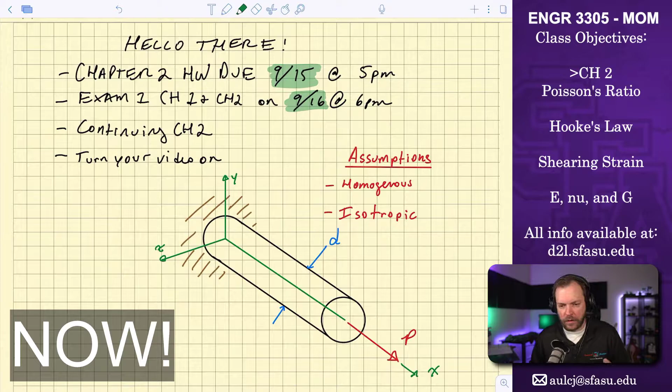All right, so kind of a review from last class. We're dealing with chapter 2, which introduces the concept of the stress-strain relationship and axial load. One of the things we talked about beforehand is that the major assumptions we're going to make in this class going forward are that we have homogeneous and isotropic materials. So homogeneous, what does that mean?

You can unmute yourself or type in chat. Is that a single body? Not so much. But when we say, for the context of this class, that a material is homogeneous, what does that mean? It's one solid, one material, right? Not specifically. It's saying there's no difference spatially throughout the material.

The big thing is like the difference between a chocolate chip cookie versus a sugar cookie, right? So we're dealing with sugar cookies in this class, not chocolate chips. With chocolate chips, at some points in space you might have chocolate, and at other points you have cookie. That's kind of the point here. It's an important distinction because there might be some materials you work with where that doesn't hold true.

The other one is isotropic. So what does isotropic mean? Are you guys even here? What's going on? Is that the XYZ plane, the way it sits in the XYZ plane? Not so much that. It's an assumption we make about the material.

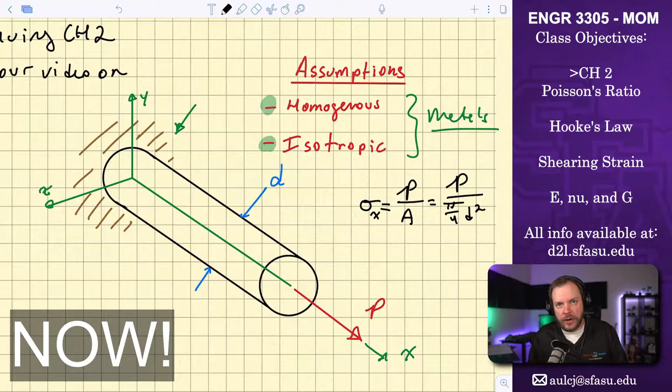It would be axial stress in this case, down the x-axis, or sigma x. That would be equal to whatever my load P is divided by the cross-sectional area. That cross-sectional area we could rewrite as P over pi over 4 d squared, the way we have it written.

And we know from Hooke's law that this sigma x would be related to E, and we're assuming it's isotropic and homogeneous. So we have the E, which is what?

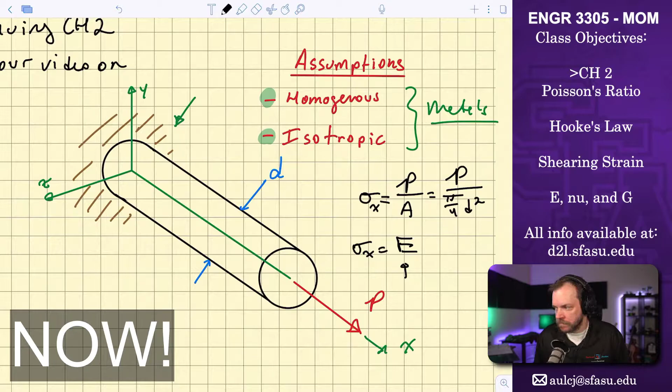What do we call E? Young's modulus of elasticity. Yeah, so Young's modulus or modulus of elasticity, but typically you don't say Young's modulus of elasticity, it's too much. I was looking at data sheets for PLA yesterday, and they had something weird - they didn't have Young's modulus, they had tensile modulus. That's similar. So the idea is there's a modulus of rigidity, which is sometimes used for shearing, and we'll talk a bit about that in a moment.

But that's probably referring to this relationship here, because plastics to a certain extent can be assumed to be what we call linear elastic - if it abides by Hooke's law, this is a linear relationship. You should know that. So E here is just a variable dependent on the type of material, and epsilon x would be the deformation along the x direction.

But we also understand that if I were to pull on this long enough, there would be a deformation that occurs in the diameter direction, or the lateral direction. This relationship between the strain we'd expect to see along the axial direction versus the lateral - there is a relationship between those two, and we'll talk a bit about that.

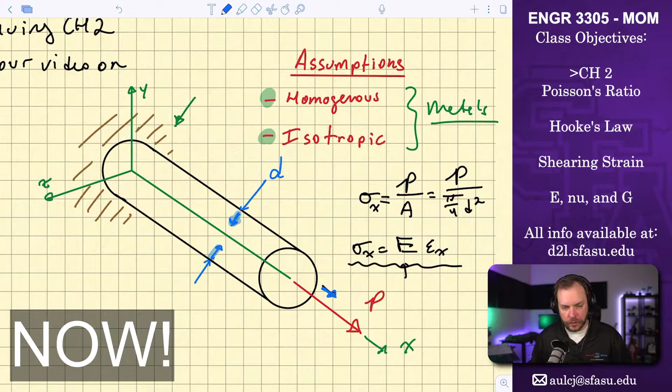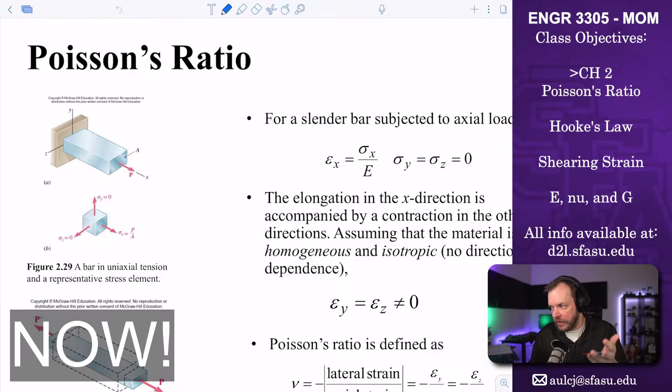The first person to really observe this relationship is a French mathematician, Poisson - Siméon Poisson, the same guy that Ely had brought up. He's a mathematician, very popular. This idea of pulling on a piece of material with load P - if I were to take any block out from this piece, I could qualify it and say the stress is going to be the same across the surface. We're assuming load P is applied in such a way where the stress is consistent.

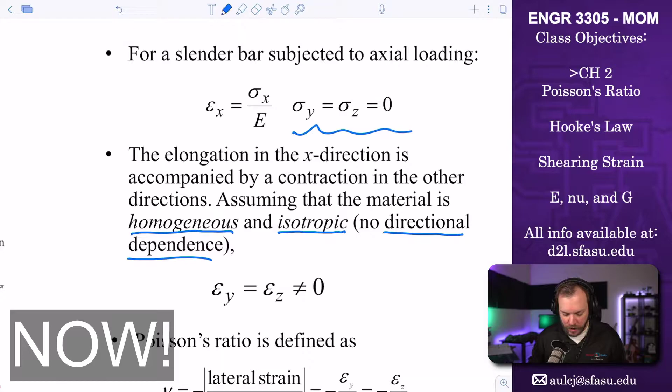We do not expect to see any stresses in the Z and Y directions based on our reference points here, but that does not mean we're going to see no strain. So the strain that comes into play, even though the stresses are considered zero, there will be strain in those directions. That's where we say homogeneous and isotropic - a simple way of putting it in layman's terms is there's no directional dependence or spatial dependence, it's all the same material in every direction. These strains are not going to be zero, so that's an important aspect to understand.

Poisson's ratio is used, and we use this Greek letter. Does anybody know what this Greek letter is here?

Nu. This is nu, and the way I write out nu, it looks like a V, so it can be confused with V. So I typically write out nu as having almost like two curls that we kind of see there. That's really exaggerated—a lot of times it'll look something like this.

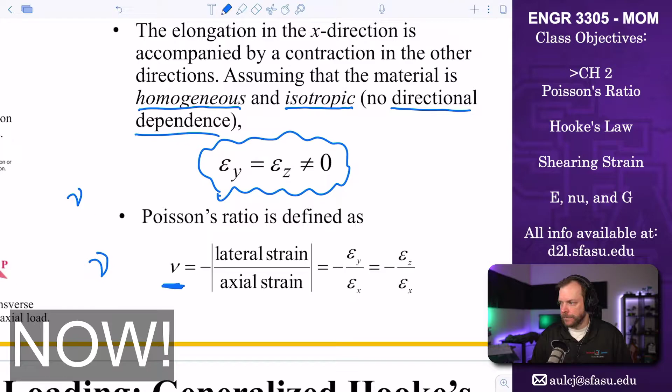It's a ratio of strain. So what are the units of nu, or Poisson's ratio? Unitless? This one is indeed unitless. There's no special units like millimeter per millimeter or anything like that. It's unitless, and typically it's going to be bounded—around 0.3 for a lot of steels or metals, but always less than, or less than and equal to, 0.5.

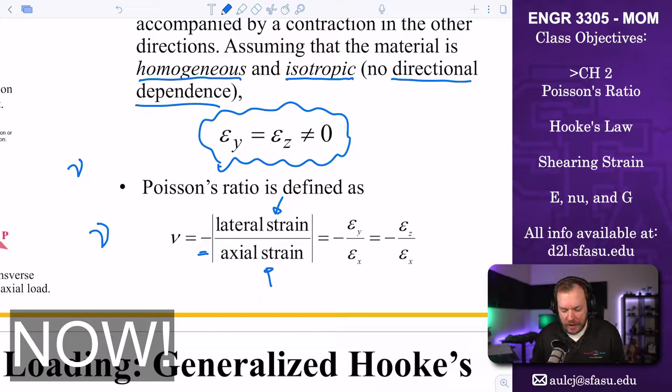I think you have to look into some theory of elasticity to see what this relationship is. It's a negative quantity, and we say the lateral strain, which is the strain in the direction out of the plane, and the axial strain is on the bottom. In the example of my cylinder, we have this quantity, this relationship—let me get rid of this, sorry, that's been up there. I was about to say something.

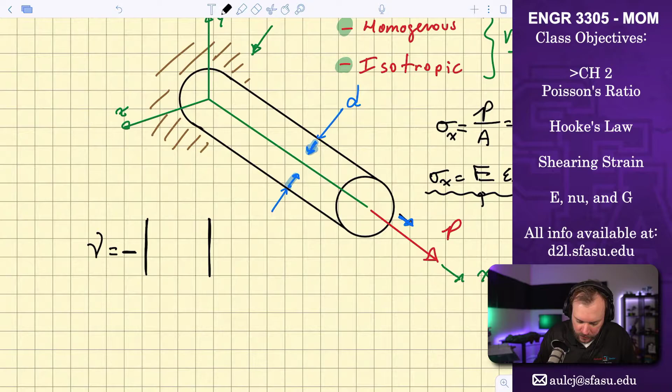Okay, good, unitless—yeah, nu's unitless. So here we've got Poisson's ratio, which is equal to, and we have to remember there's a negative here, and then the absolute quantity of it. In this case, if we're doing this in a particular direction, I can choose either. So the lateral strain—say for instance, epsilon y over epsilon x. That would be my relationship for Poisson's ratio.

Now why is there a negative here? Why do you think there's a negative that's put there? I'll look at chat, or just guess—do you have to do something with the graph?

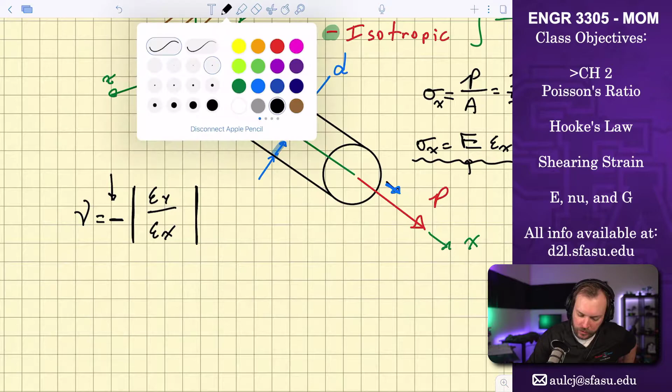Well, let's think about what's going to happen here. If I have strain where this is starting to come out like this—say, for instance, this part is elongated—that means epsilon x is positive, correct? It would be positive strain because it's elongating. Remember, if it elongates, it's positive strain; if it contracts, it's negative strain. You can have negative strain, right? What would happen if epsilon x is positive? What's going to happen to epsilon y?

It would shrink a little bit. It will shrink, okay? So think about it—if you take a rubber sheet or something and you pull on it, you'll get long in one direction, but it's going to get smaller in other directions. That's why the negative is set up.

A better way to look at this is I'd say epsilon x is equal to negative nu epsilon y. So if I have a positive relationship for epsilon x, I should have a negative for epsilon y. Does that make sense? There has to be a negative—there's going to be a reduction in quantity there.

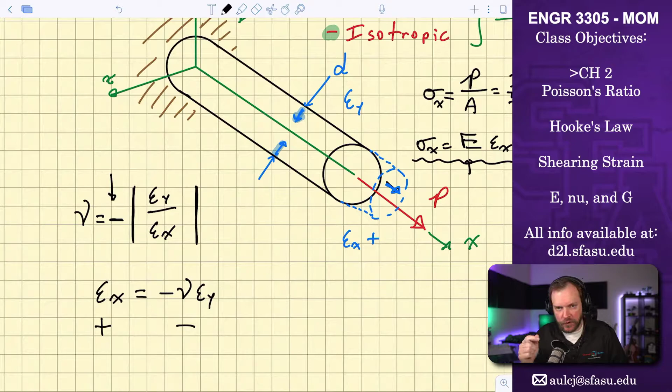Reduction—now, one thing you have to recognize, it's conservation of mass, but it's not conservation of volume. In fact, the volume that you'd expect to see—if I'm given the way they're showing this here, this was the original shape where the dashes are, and this is the new shape, already strained. Remember, we're not considering the dynamics; we're only considering after the loading has taken place. So if the shape was originally in the dashed line, there's going to be contraction. In a real case it won't be completely uniform, but here we're just assuming that it is—like it's going to be complete reduction.

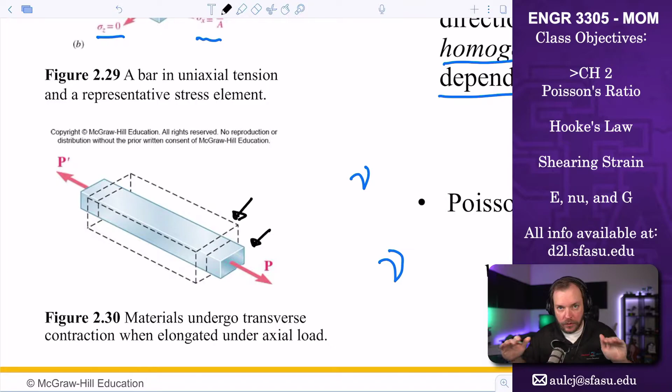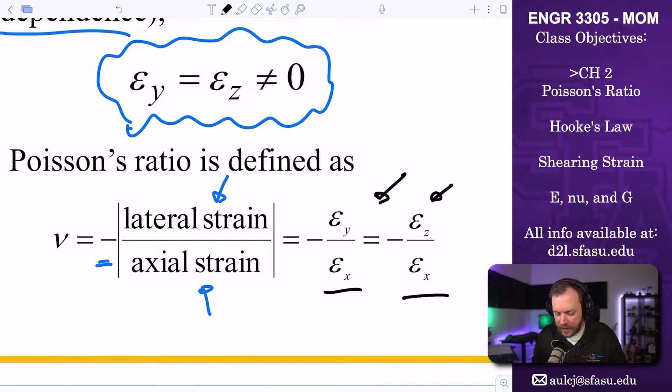In this case, you can use this relationship for both epsilon y and epsilon z, and it's always referred to by the axial strain, which is defined by the fact that we're working with axial load—so this is when you're pulling on something along an axis, it's always dependent on that. The volume will change; there will be a change in volume, okay? And that's touched on a little bit afterwards.

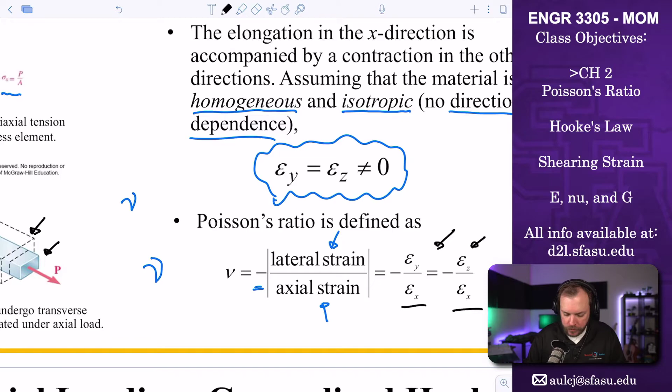But the important thing to remember is this is something you should just know right off the bat. I shouldn't have to say, if you're working a problem out and I say tell me what the change in the lateral dimension would be, you should then go through and model it and know Poisson's ratio. This is also categorized or cataloged in the appendix—appendix D, I believe, from last class. It shows up with the yield stress and so on and so forth. So that's an important quantity to follow through, and there are some homework problems based on that.

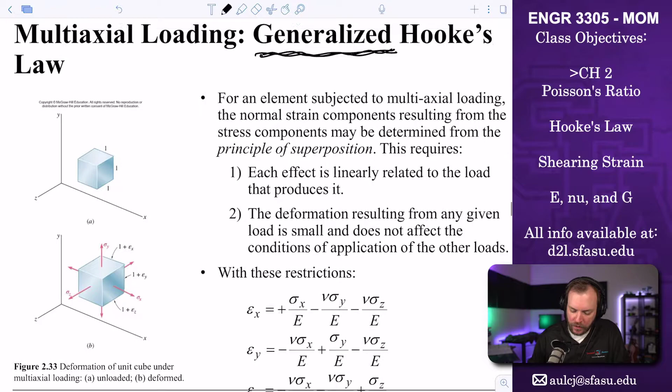The next section describes what we call generalized Hooke's law. This sets up relationships that will be helpful in the homework and on the exam, given a three-dimensional setup with this idea of principle of superposition.

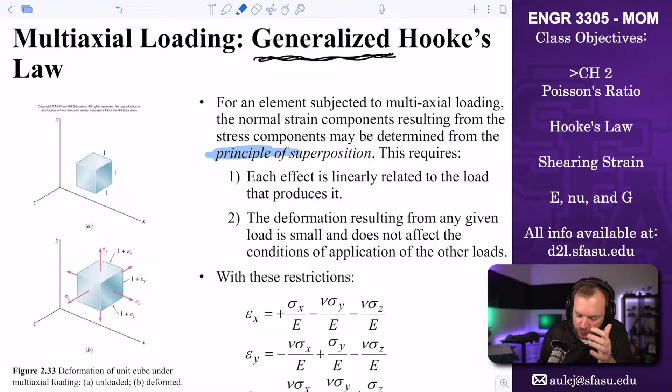If you're taking notes, this is something you really want to write down, and it's going to hold true for the rest of the class. If I had to have one statement about this class, it's that we're using principle of superposition. What is principle of superposition?

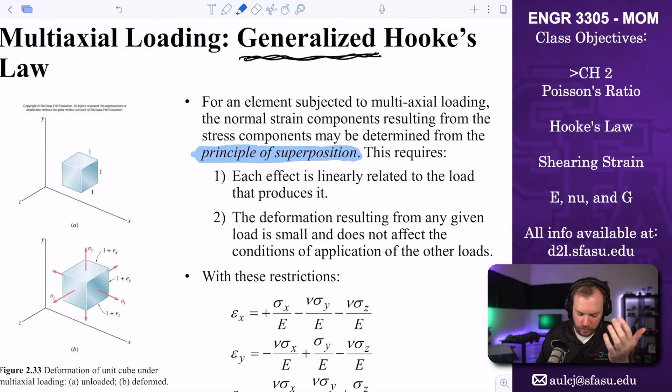It's this idea that we're working with typically very small deformations relative to the size of the original object, and also we're working with loads that do not go past what we call the proportional limit. So what is the proportional limit for a material? Yield? No, you're on the right track.

A lot of times yield stress, right? Coming back to our stress strain diagram, this is my sigma and this is my epsilon. For a given material, you have a linear relationship, and then at some point it stops becoming proportional. So when we say proportional limit, it's no longer proportional, meaning it no longer has that linear relationship. And if we go past here, we cannot use principle of superposition.

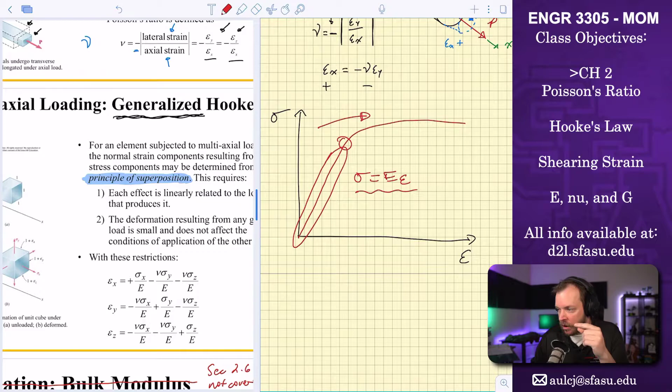But if we are living in this region, remember, when sigma equals E epsilon, we can use Hooke's law, we can use superposition—at least for one part of the problem. The other thing we talk about with principle of superposition is that for multi-axial loading, with different loads—whether shear, bending, or any other type of problem—the second axiom is saying that we have to make sure the deformation resulting from any given load is small, and it doesn't really affect the conditions of the application of other loads.

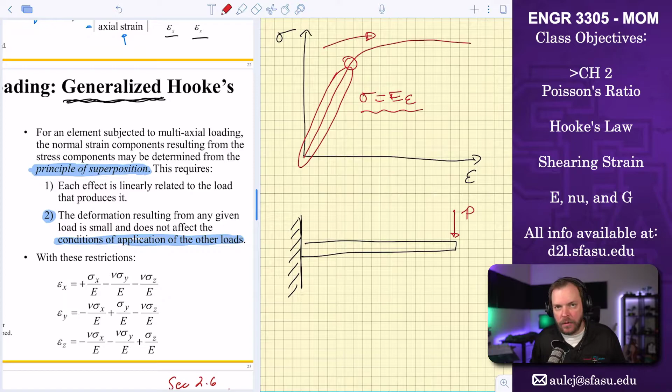What does that mean? Let's consider a beam sitting off the edge of a fixed wall. If I were to put a significant enough load down at the end, now we're not dealing with axial loads, but this is probably my best way of illustrating this—think about a diving board. If I had a diving board and put a load on it, I would expect to see it do something like this.

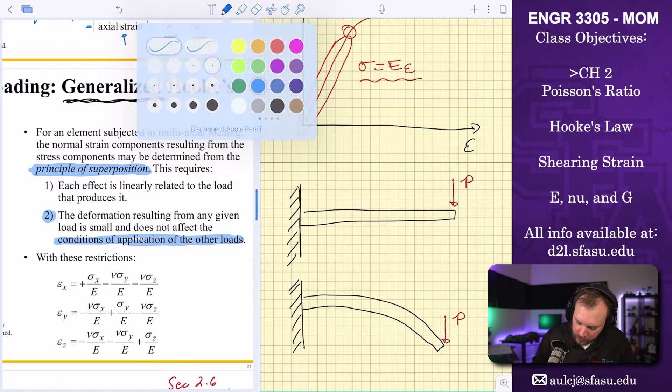Now, if I have the same load P—I drew it bigger, so technically it should be the same—if I have the same load P, and it causes this to deflect downwards so much that, if we assume this is the same location, now we're at a new location. So what's happening there is it's changing. If I were to do a free body diagram for this, what's going to be different is the position of the force moving the moment.

So it's going to change—not the axial or transverse loads, but it's going to change the moment. And if it changes the moment, then it's no longer static. Technically it's in such a way that there is some change in the relationship.

This typically occurs when we see excessive deformations. A lot of times the way I think about it in this class is in order to use principle of superposition, you're linear elastic. And typically if you're linear elastic—unless you have a very big elastic range for a material, especially with metals—you'll also satisfy that you're not going to see a significant change in the positions of the load. That's what some people were asking before.

It's like, well, if you were to add the strain in there, technically it would move it enough that it would be a change in the moment, and you could actually calculate that change in the moment. It's going to be such a small value that it really doesn't matter. So if those two cases hold true, which are major assumptions, then you can use principle of superposition.

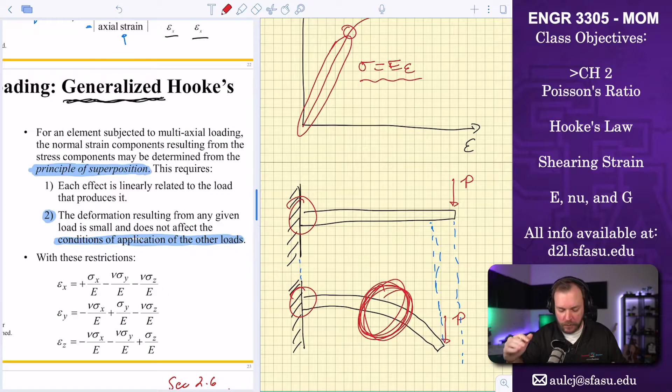Well, what is principle of superposition? What that represents is now I can consider, say for instance, I have a load in different directions, and that's why they talk about this idea of multi-axial loading.

Meaning I have loading in the Y, the X, and the Z. If I have different axes, I can consider these as three different problems in X, Y, and Z, and then add together the strains that develop.

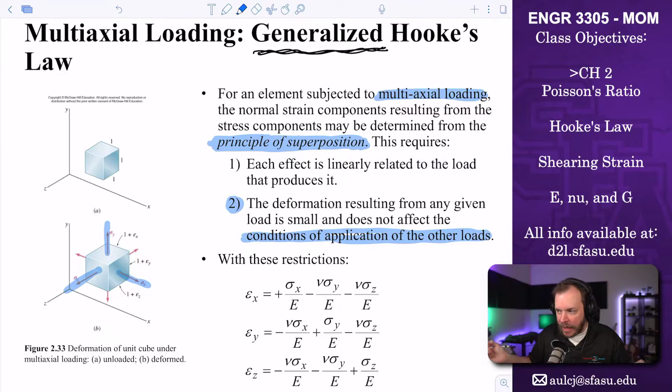This is going to be the same thing when we get into shear or bending. Once you get used to all the different loadings and what kind of strain they develop, you can just add all those strains together. Same thing goes for the stress.

I'm not going to go through the derivation, that's in the text, but you can think about it. If I want to find epsilon x, from Hooke's law it should just be sigma x over E of the material. Remember, E is isotropic and homogeneous, so it's going to be the same in any direction.

But you also have to consider that there will be some change in dimension from the stresses occurring in the Y and Z directions. You're going to have a homework problem that gives you this complex loading structure, telling you there's stresses in each direction and asking for the overall change in dimension. You'll have to come back and look at this relationship.

On an exam, if you wanted this as your theory, you can start off with that. Now, a lot of times maybe you won't have one of these stresses, maybe you don't have stress in the Y. You can ignore that or say it's zero, but you have to consider the stress in the other directions. This is where Poisson's ratio shows up, it always shows up in the out-of-axis stresses.

If I have, in this case X, we know the relationship for strain in X is just going to be nu sigma Y or nu sigma Z. Does that make sense? Is that clear?

So this is a small section, but it's really important: understanding this idea of superposition and when we can use that. Any questions so far?

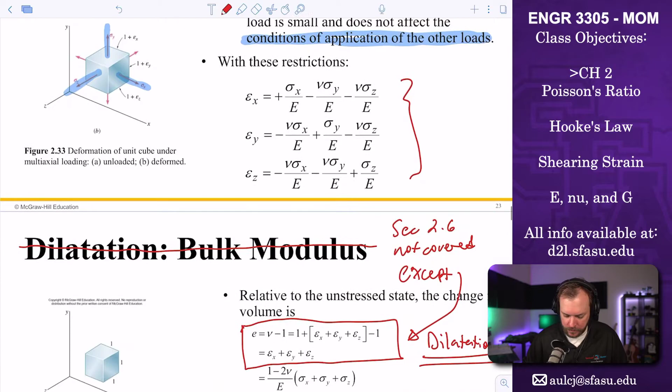I had mentioned before that any chapter sections with a star next to them, we're not going to cover in this chapter. That's section 2.6, I think the first one with a star, except for one of your homework problems you need to use this relationship, called the dilatation.

All it is, you just have to know what that relationship is. It's just summing up all of the epsilons for the X, Y, and Z directions. What that represents is the change in volume per unit volume, that's why it's a dimensionless quantity.

The way you would find the new volume, if you want to find delta V, you would just say this lowercase e multiplied by the original volume V. What is that small e?

It's called dilatation. In this class, I guess they're using e specifically for dilatation, it's not exponential or anything else. It goes to the text, we're not going to spend time on this.

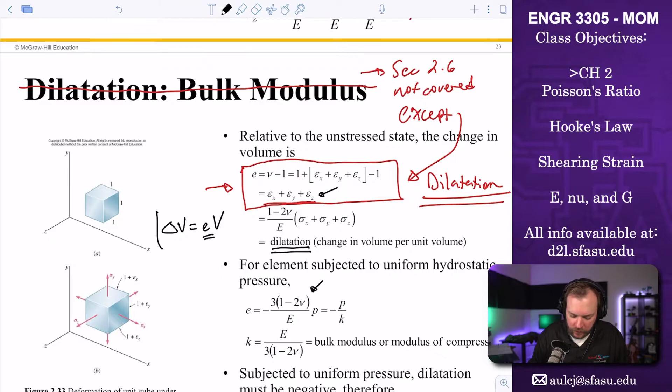But it does show up, a little bit going down the line. You can also find it by relationship with other factors, but we're not going to get into that. All you have to know is it's really this thing here: the change in volume would be, I'm sorry, not epsilon, but it's just e multiplied by the original volume.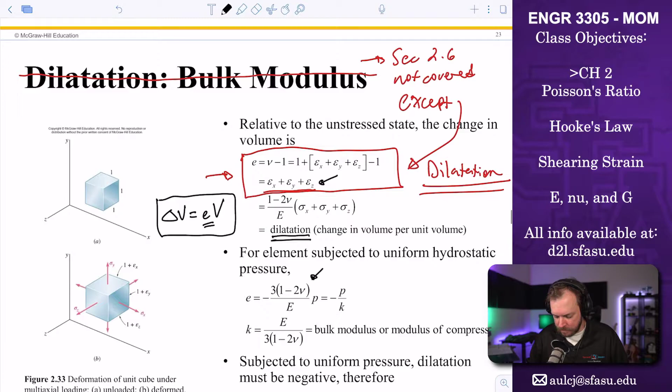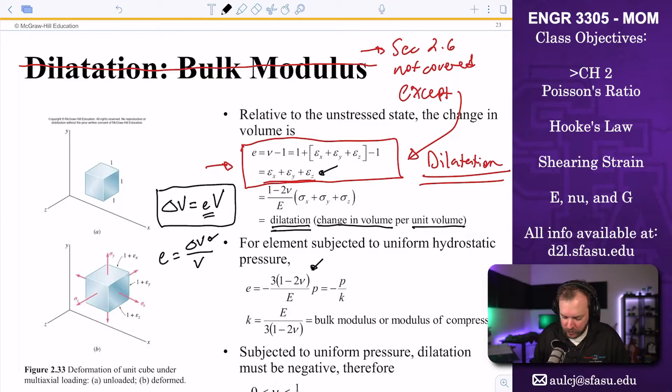Because really, if you want to think about it, e is just delta V over the volume V, change in volume per unit volume. Is that clear? Okay.

And here they show the bounding for nu, because of that relationship with e. Anyways, so you'll never see, if you ever use nu larger than 0.5, you're doing something wrong. Especially, I think there are problems that say calculate what nu is.

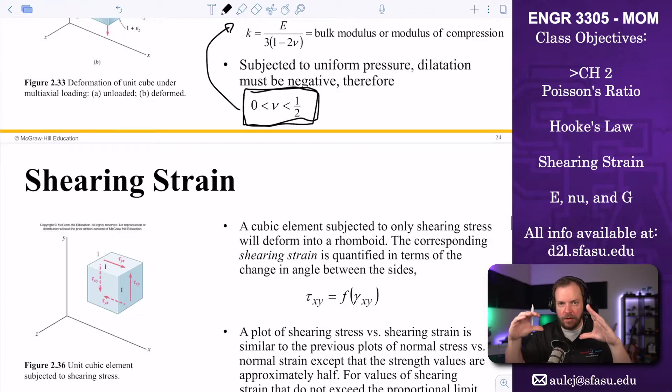You may on an exam see it gives you the strains or information about the strains, and you might have to calculate what nu is. No, that's just unrealistic values, it's like physically cannot occur, Poisson's ratio, by changing the direction. The way you calculate that is you look at how things are going to strain.

The next section in the textbook talks about shearing strain, and shearing strain is kind of the next level. Right now we're talking about axial stress, and axial stress won't develop shearing strain unless you change your orientation. We'll talk about how some loading conditions will develop shearing strain.

What is shearing strain? We know the quantity for shearing stress is tau, and it gives that sliding motion. So if I have an element under pure shear, and this is in equilibrium, then these tau values should be the same at all points. If we satisfy equilibrium, they should be the same. We calculated that before, that's from chapter 1.

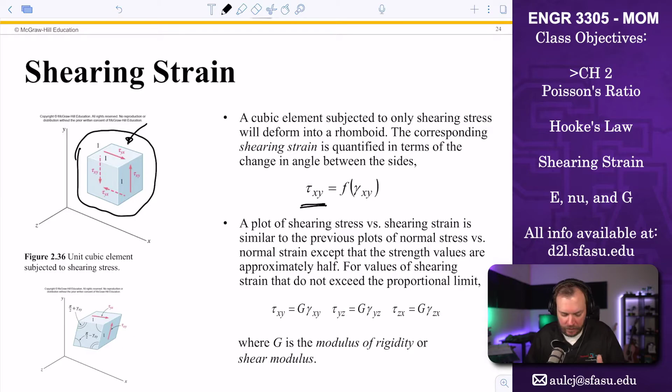But what kind of strain are we going to see from the shearing stress? Let's simplify it, like the textbook does with this picture. Let's start with the original shape, and consider that the shearing stresses will look something like this, so it will change the geometry in various directions to look something more like this. Now, this is, of course, very exaggerated.

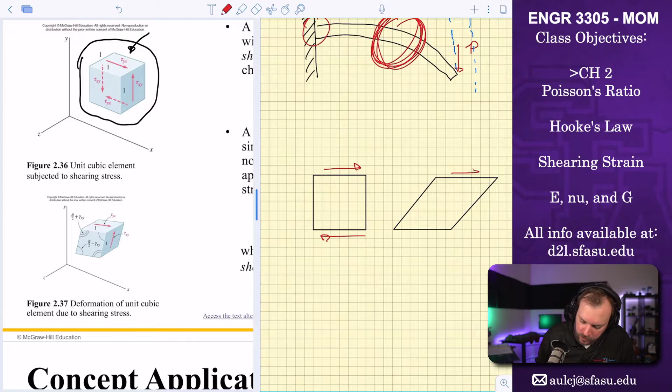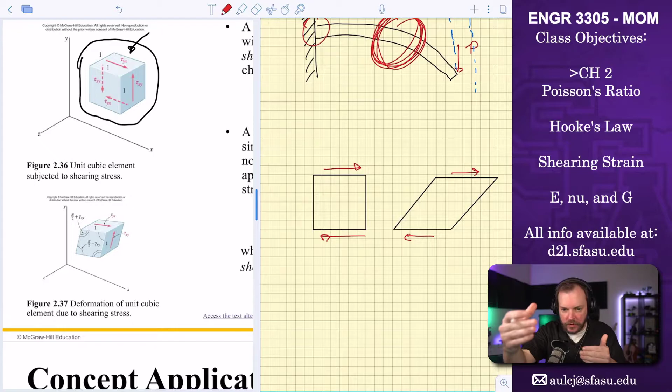But how do we define the strain in this case? Axial strain makes sense: if you have a length change, we'd expect that to be axial strain. But shearing strain is different because now it's a change based on angle. The way we define shear strain is, say, for instance, I take a horizontal line here, which would represent the original position of this element. The angle that we see here is this Greek letter.

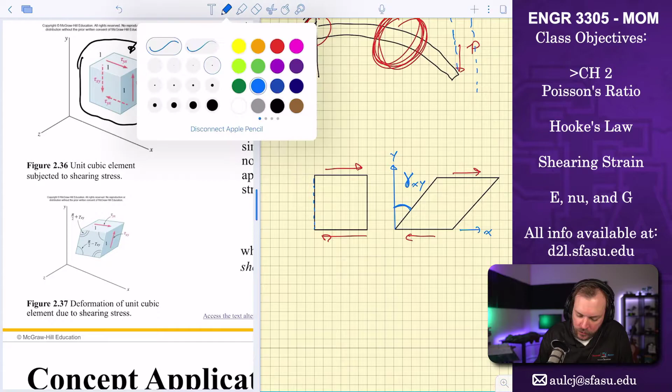What is that Greek letter? Gamma? That's gamma, okay. Now, for shearing strain, it's very dependent on the plane you're working with. So typically for shearing strain we always identify the plane. In this case, that's my y, and this would be my x, so I call it my xy strain. A lot of times you'll see it defined by this angle, which is what they're doing in the textbook, where they say it's pi over 2 minus gamma xy. If you're following at home, you recognize that this angle here is 90 degrees, so the angle of the new material will be related to the 90 degrees.

Now, remember, gamma is always going to be in radians. Always use radians for gamma. At the end of the day, you can put it back into degrees to get a functional feel. I've been using radians for a while now and I still don't have a functional feel. I know pi over 2 is 90 degrees, but if you give me some fraction of radians, I don't know how big that is. Or if you give a numerical value in radians, I don't really get a good feeling, but with degrees we have a better understanding. So you can always translate it back to degrees if you want to figure out how big these strains are.

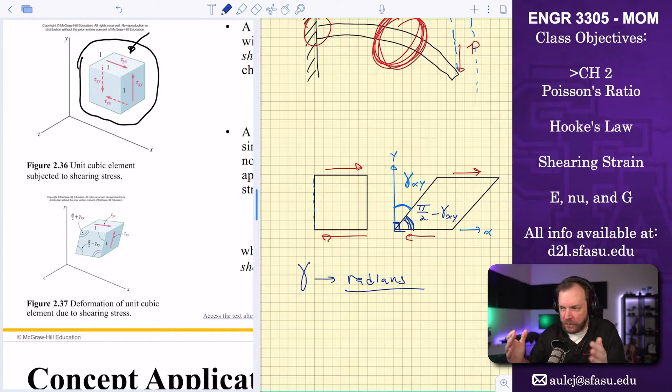Now, just like we have Hooke's law for stress, this becomes our strain relationship. So for Hooke's law, we could say that the shear stress will be equal to some proportional factor, like we have Young's modulus for axial or normal strain, multiplied by the shearing strain, and the letter we use is capital G.

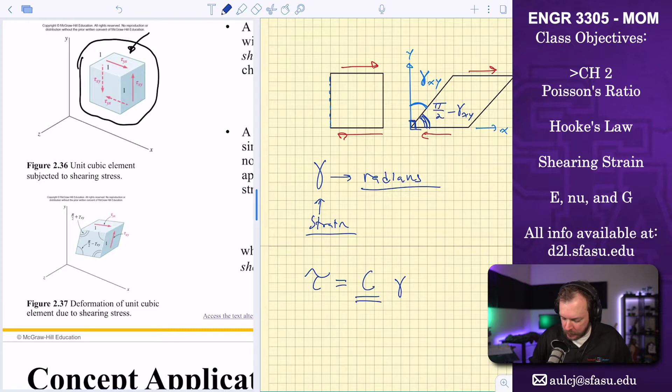Capital G has two names we go by: modulus of rigidity, because G is now, whereas E is more a function of how things displace in a given direction, G is for shearing. So if we expect to see sliding motion, it tells us how rigid a material is, and that's why we call it modulus of rigidity. The other name is shear modulus, and I might use either term on an exam, but you should immediately understand that this is G.

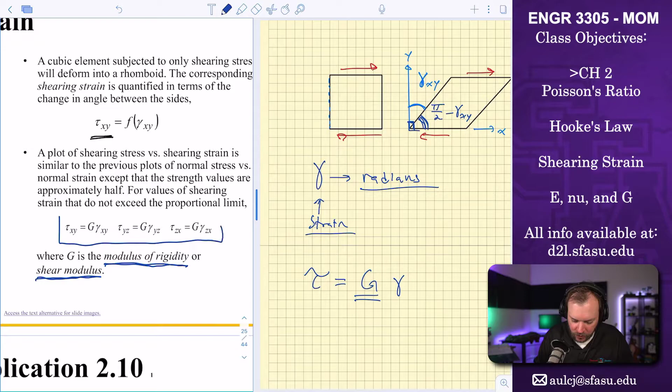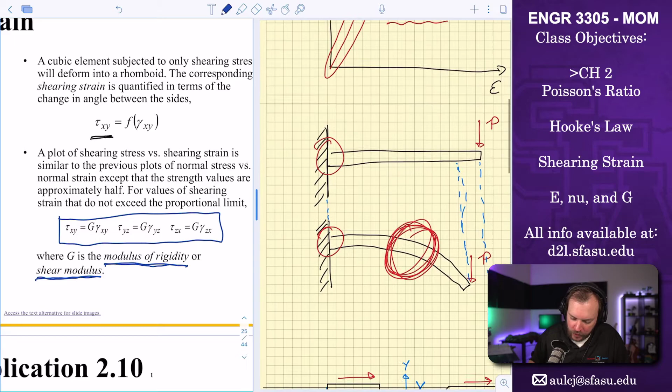And so Hooke's law now can be applied in all directions, and it also has technically a proportional limit, so it will be linear to an effect, and it will share a similar curve to what we see here.

Now it's not as categorized, and sometimes a lot of what you would do is say the yield stress for axial and the yield stress for shear is roughly the same, but they may not be, depending on the material properties. So just like the stress-strain relationship for axial stress and strain, we have the same kind of treatment for shear stress and strain.

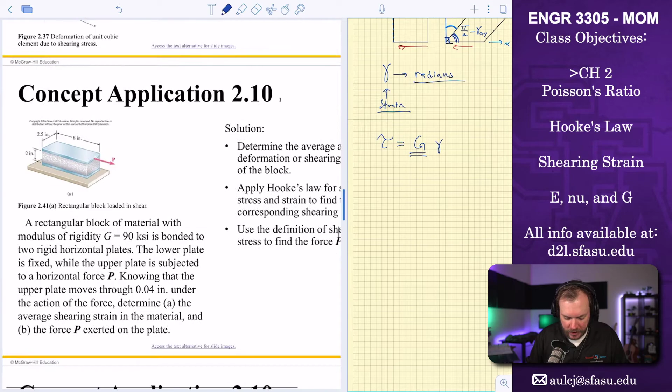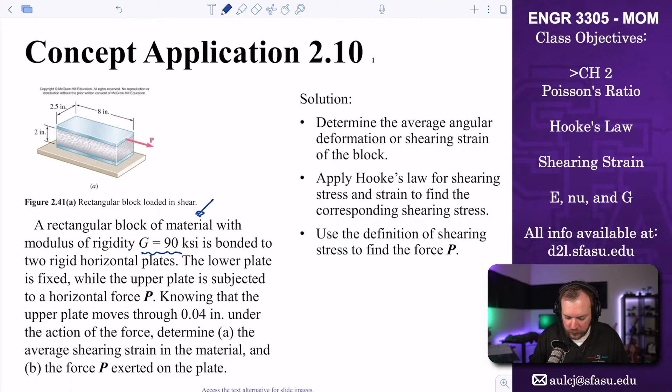So let's look at an example of how we would use this. If I were to take a block of some material, we don't know what the material is, but it gives us G, which is what? 90 KSI. Yes, it's 90 KSI, but what is G? Shear modulus. It's the modulus of rigidity, right? So when you see that in a given problem statement, you should know we're going to be calculating shear.

It's bonded with two horizontal plates, and these plates are rigid. The lower plate is fixed, and the upper plate is subjected to the horizontal force P. Knowing that the upper plate moves through 0.04 inches under the action of the force, determine A, the average shearing strain in the material, and the force P exerted on the plate. Doing this example, this is the easiest problem you're going to run into for this type of work, but you'll have homework problems similar to this, where you'll have to start off with the geometries and go through.

The solution procedure here, thinking ahead: first we can determine the average angular deformation because we're given information about the geometry. The top plate is moving 0.04 inches, which is a very small value. It's very small, so a lot of times in these types of strains, because we're assuming linear elastic, same thing goes for this quantity here. We're working with very small angles. So what is the small angle approximation? Sine theta is equal to theta, right?

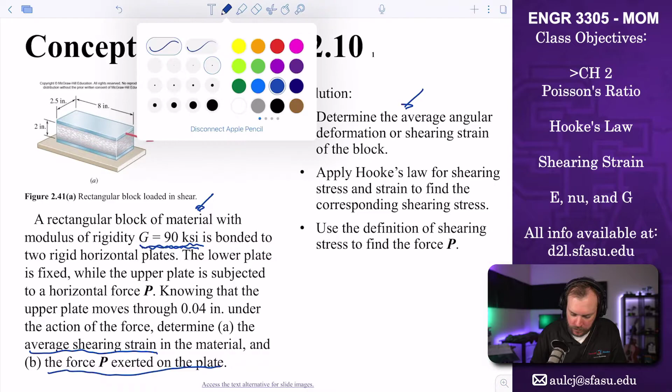So in small angle approximation, we can say sine theta is equal to theta. What about tan theta? Not zero, it's equal to theta. What's tan theta equal to? Sine theta over cosine theta. So what's cosine of a very small value? One. So what's tan theta? Theta, because it's theta over one. Exactly. So sine and tan theta, this is the small angle approximation.

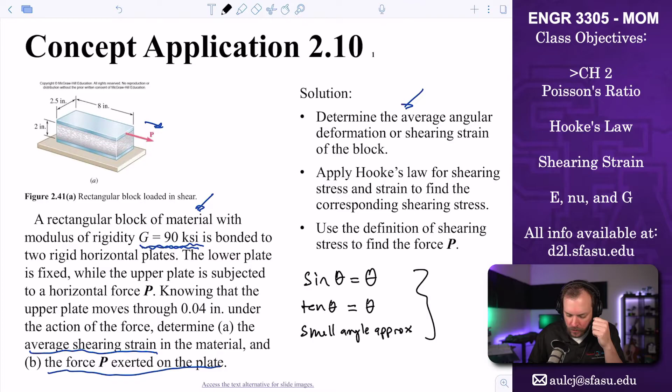And if you don't want to use the small angle approximation, you're certainly welcome to try to do it, but what you're going to find is that the small angle approximation in these cases is very good. We can use this relationship to solve this problem, and that'll help us out. We'll also have to apply Hooke's law for shearing stress to figure out what that shearing stress will be, and then that's how we'll determine P. So let's go through and solve this problem.

So we have our knowns. The known problem is G is equal to 90 KSI, which is kips per square inch. We know the deformation, let's call it delta, of the top plate, 0.04 inches. No other numbers there, but we have the information from the picture.

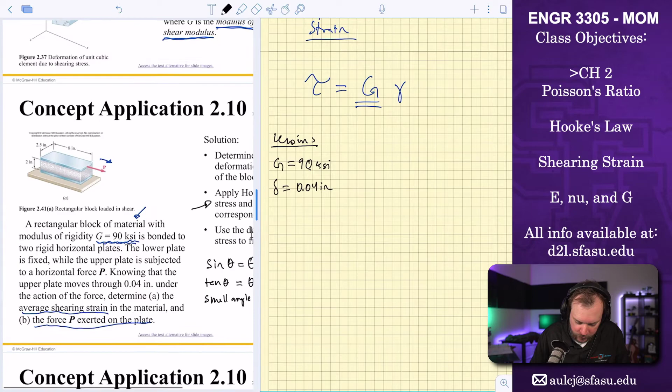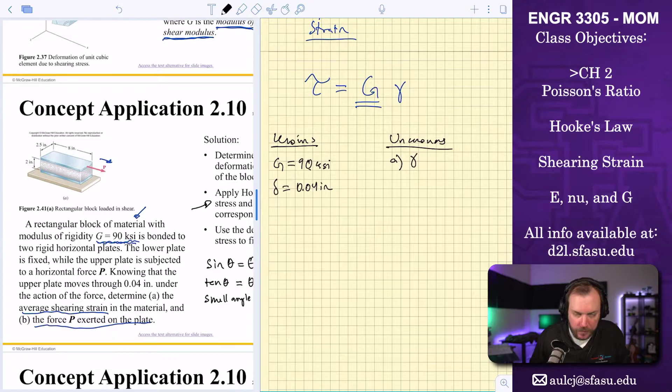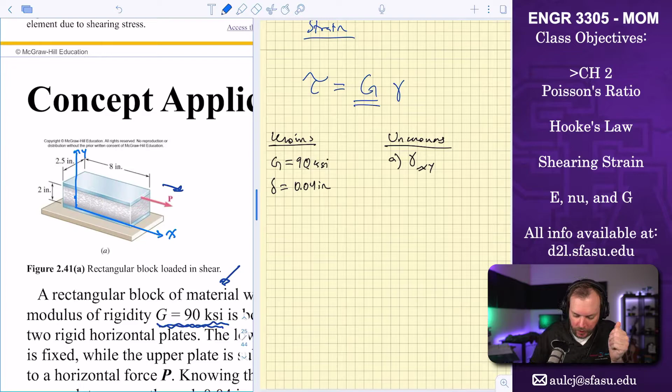So our unknowns: part A is looking for the average shearing strain, so we're looking for gamma. We'll call it gamma xy, assuming we put a coordinate system like this on the material, it'll be gamma xy. And then it's looking for the force P.

My diagram here, not really a free body diagram, but we're going to do a diagram. I'm going to simplify this and draw a rectangle. We're going to start off with the original shape, and we know the top plate is going to move over a certain amount under that load P. Remember, we're not considering the dynamics, we're just considering that it has moved. In this case, the new shape is going to look like this.

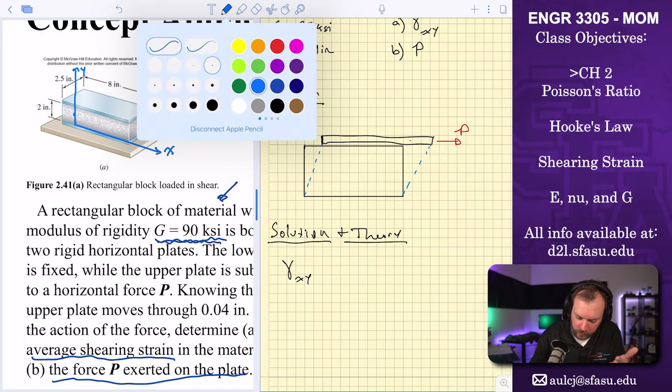For our solution theory, we should understand that gamma xy, in this case, let me make sure I have the coordinate system labeled: that's my y, that's my x, and this here would be my gamma xy. Gamma xy should be equal to the tangent of whatever this value is. This distance would be my delta, and this distance was 2 inches, so let's call this quantity, to be general, h. So the theory is that it should equal the tangent of opposite over adjacent, so that would be delta over h, but from small angle approximation we just call it delta over h.

So here my gamma xy would then be equal to delta, which we said is 0.04 inches over 2 inches, which is equal to what? 0.02, and that's going to be radians.

If we wanted to find this in degrees, we could say that's equal to 0.02 radians multiplied by 180 degrees divided by pi radians. Radians will cancel out. So what is that in degrees? Is it 9 degrees? 3.6? What is it? 1.14 degrees.

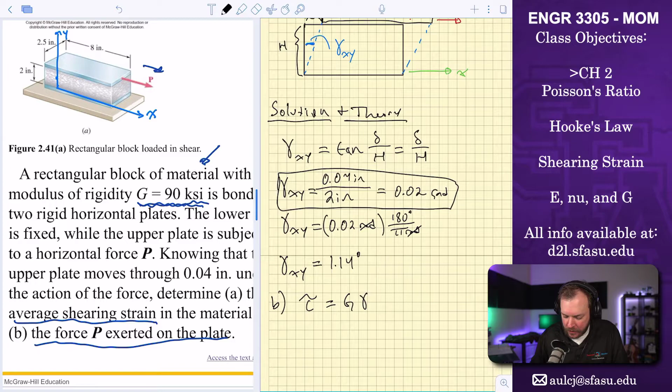The next part, part B, the theory here is then Hooke's law. Remember, we had shear stress should be equal to G multiplied by gamma. G is given to us. Gamma we already found, but we're trying to relate that back to its load. And so here, looking at our picture, the load P is what's causing that shear, right?

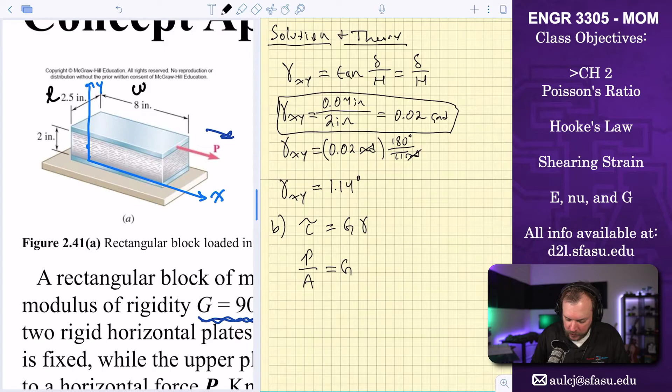So then we can rewrite the theory to say that should be whatever value P over the cross-sectional area. In this case, if we say this is our width, and this is our length, and we can come back over here and say this is G gamma, then our P over length times width is equal to G gamma. And then my load P would then just be equal to length width G gamma.

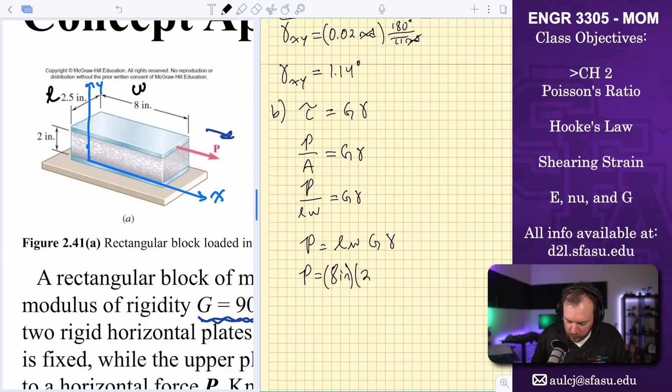And so P would then just be equal to length and width, we said is 8 inches multiplied by 2.5 inches, and then multiplied by G, which is 90 KSI, which we say times 10 to the 3 pounds per inch squared, and then multiplied by gamma, in this case 0.02, right?

So what is my load P? And this is going to be in pounds, right? Because my units cancel out here. What is that P? 36 KSI. What is it? 36 KSI. I got 3,600 pounds. 3,600?

Pounds, yeah. So what's wrong with 36 KSI? What's immediately wrong with that? Because it's not a pressure. It's not supposed to be a stress. So here we use stress. In this class, we talk about stress, right? So it's not a stress. It should be, this is a load. It should be in just straight pounds or newtons or whatever. But that's an issue there. So is it 3.6 times, or so we'd say 3,600 pounds? Okay, so it would take 3,600 pounds to get this material to shear over like this.

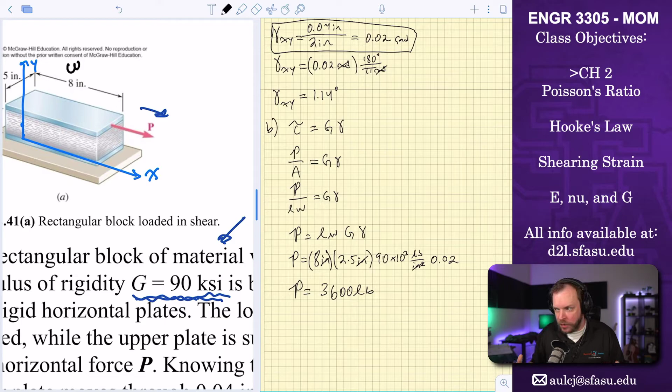And think about it, 3,600 pounds, that's a lot. That's like the weight of my car or something, you know? That's the amount of load that's needed to make this move 1 degree, right? So you can kind of get a feeling that we are working with loads in such a way that it kind of makes everything a little bit easier to work with.

Do I have any questions on that? And if you have questions about this, this is literally worked out in the textbook for you, but it will help kind of going forward. Do I have another question?

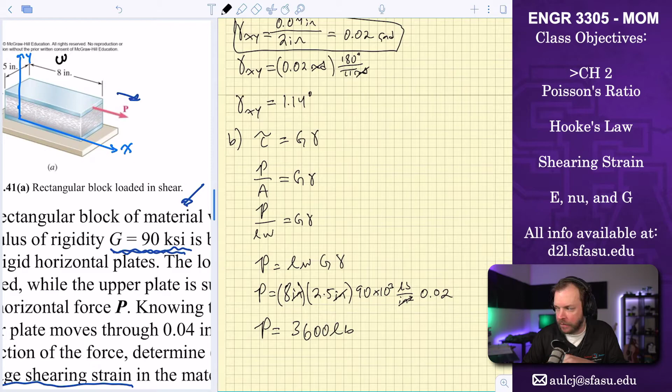Question about shearing strain. Does it have a similar property of superposition? Yes. So superposition is allowed for stresses and strains of any type. And by any type, I mean the two, you know, normal or shear. So, yes, it's because, and what we find, and this is going to be the next section we talk about...

If I look at a problem, right? If I look at something where I say these two are the same cases, the only thing that's different is how I drew my original shape.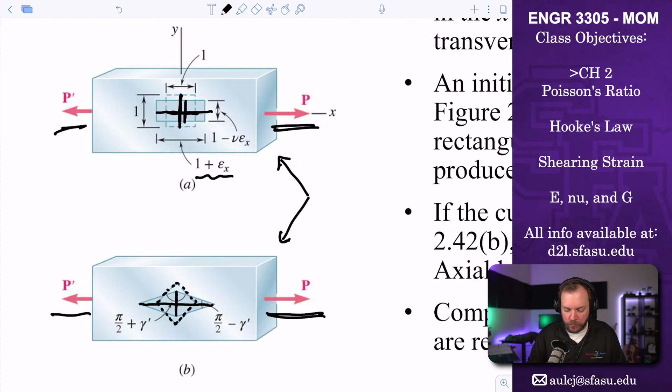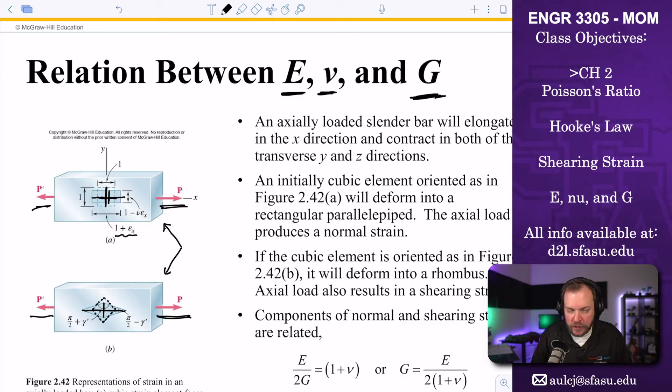And so we can relate these just by geometry—we can relate E, your modulus or Young's modulus of elasticity, nu, Poisson's ratio, and G, the modulus of rigidity or shear modulus, by looking at the geometries here. I'm not going to go through the math; the textbook does a pretty good job of showing that relationship, so I'm not going to do that here. But ultimately what you have to remember is this.

Sometimes you'll have a problem—I might do this on an exam—where I give you a problem where you have to solve axial load, which you've done before. Then I might say, also, what's the shear stress at this one point? And I won't give you G; I'll just give you E and Poisson's ratio. From those relationships, you should be able to determine what G is and then use the shear stress aspect to solve the problem. So it's important—this is an equation you should have written down, and it would be handy on an exam.

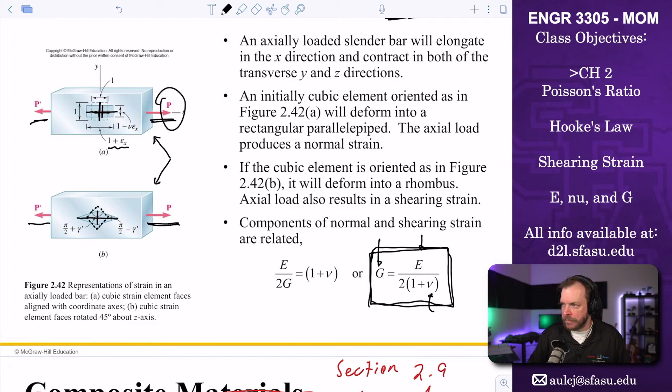Section 2.9 is not covered—it's one of those starred sections. It deals with composite materials, and it just has some generalizations we're not going to cover in this class. But if you're interested in that, it's certainly there. Of course, composite materials means you're not going to have homogeneous or technically isotropic materials.

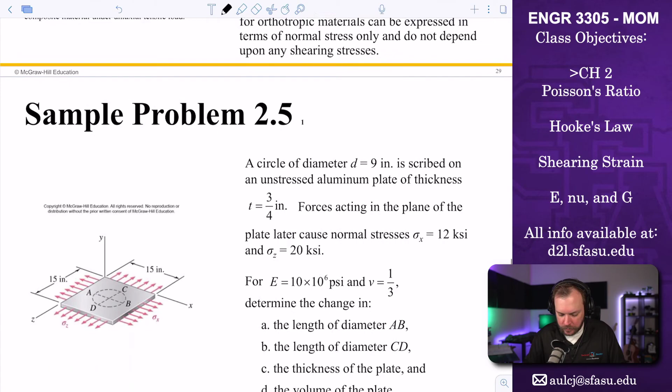So let's look at another example problem. If we have a stress on a plane—like a plate we're working with—there's a sigma x along the x direction and a sigma z, and it gives us these stresses. It also tells us that a circle drawn out, this ABCD circle, has a diameter of 9 inches, a thickness of 3/4 of an inch. It gives us the force acting on the plane, and it gives us E and Poisson's ratio.

The next thing it asks: what is the length of the diameter AB? What is the length of the diameter CD? The change—that's important. I thought it was just 9 inches, right? No, it's asking what is the change in length for AB and CD. Also, what is the change in the thickness of the plate and the volume of the plate?

So when attacking these problems, you say, all right, well first off, we know that for these two cases, because we have stress in the x and z directions, can I just say that sigma x is equal to E times epsilon x? In this case, if I find epsilon x, I should find that the value AB prime should equal the change in epsilon x multiplied by AB plus AB, or another way to write this is 1 plus epsilon x times AB. But I've got the sigma—could I just put this value in here and not consider anything else? Is that correct?

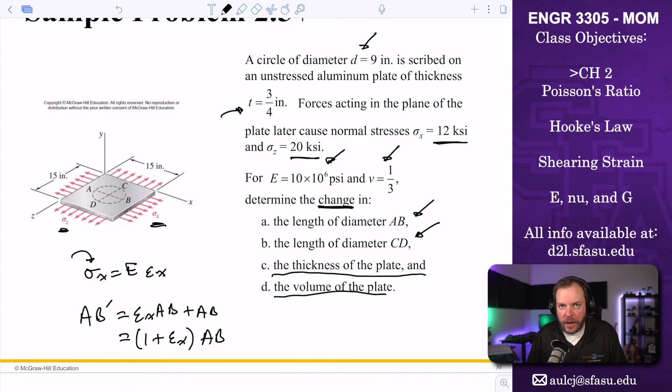Would that get me a right answer? Obviously not, because I'm asking it in such a pretentious way. What am I missing here? What is going to cause strain in the x direction outside of just sigma x?

If you pull it in the z direction, then it'll... yes. Remember, principle of superposition means I can treat this as two different problems. I could treat it as taking away this and just looking at this case, but then I also have to consider the case where we're just looking at sigma x. If I just had sigma x, this analysis is completely fine, right?

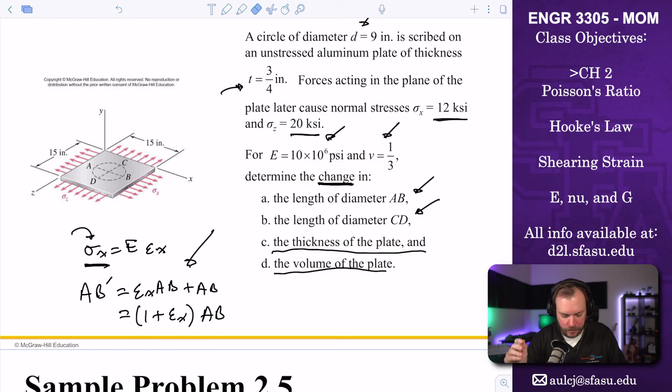The length change in AB would just be the elongation. But because we have a stress in the z direction, I also have to consider it. It turns out we have a relationship. We can find this exactly. And that's back up here with this guy right here.

This would be the equation I'd start off with. And like I said, if you just say this is asking me what's the new length in the x direction, we'd say, okay, we can find epsilon x because we have sigma x, we have sigma z, and we're not considering sigma y. And I can do the same thing for epsilon y and epsilon z.

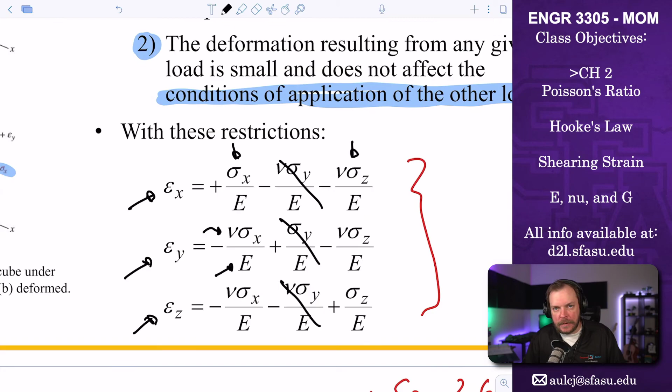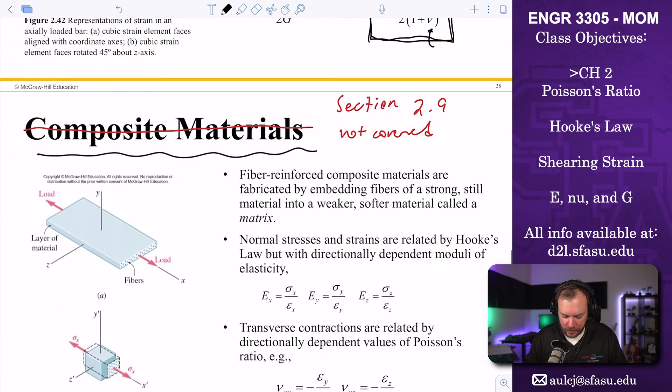Then I just have to apply it, and in each of these cases, there's no sigma y. I just have to figure out what those stresses are. But they all come back to nu and the property of the material E. Hopefully, just by doing that, you should understand - and I know I'm running out of time here - that if we go through the analysis, the book does this, that's all it does.

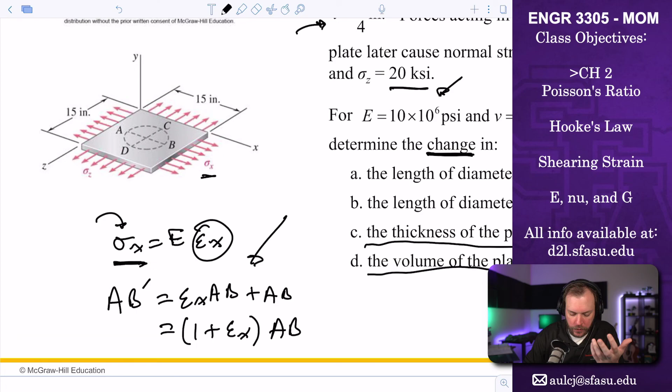It says, all right, we can find epsilon x by putting in all those values. Remember, the sigma y doesn't exist, so I don't put that value in. I get a value for my engineering strain in the x direction. Remember, this is the strain - this is what I was calculating before. That's from sigma x and sigma z.

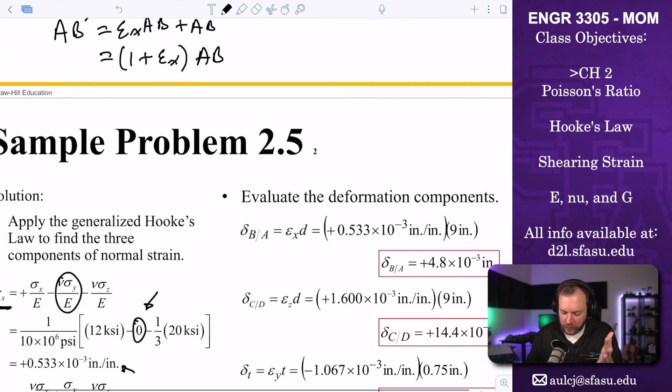I can then do the same thing for epsilon y, epsilon z. I get 3 different strains. And so then when you're trying to determine what the change in the diameter would be, I think it is asking what the change in the diameter is, right? Then you could just multiply that value by the diameter, because remember the diameter is going to be the original length AB.

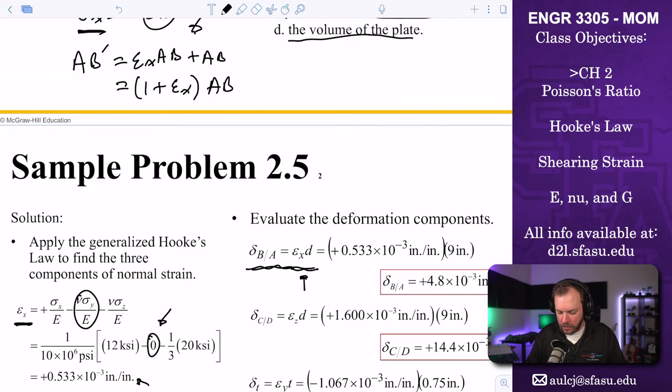And the same thing goes for my change in Z. And then the last one, the thickness, is just my epsilon y multiplied by its original thickness.

And then the very last part of this, which is what we would need from that one section, was if you calculate the dilatation - which is just the sum of all the epsilons - you get a non-zero quantity. So while you may want to infer that there will be no change in the overall volume, there is a change in the volume. And that's because we see local changes in density. The mass still stays the same, but we'll have changes in density.

And then you use the change in the volume, which would just be E multiplied by its original volume. That's how you get the values there.

So I think if you go through the sample problems, go through the conceptual problems when working the homework in this particular part of Chapter 2, that should get you to the point where you should be able to work the problems out. And of course, we'll work some example problems either on Friday or Monday, where I'll work problems throughout the chapter. And if you have any questions, we can always work during office hours, or you can set up a Zoom call, whatever you need.

But start on Chapter 2 homework today. Start working it out. Try to stay ahead of things, so when I ask you what stress is, you don't just wait for somebody else to answer.

Okay, lesson learned last week on Friday - problems 7 and 8 gave me a run for my money. Exactly. And so it seems simple the way I'm describing it here, but it can get complex the way you apply everything. Okay, all right.